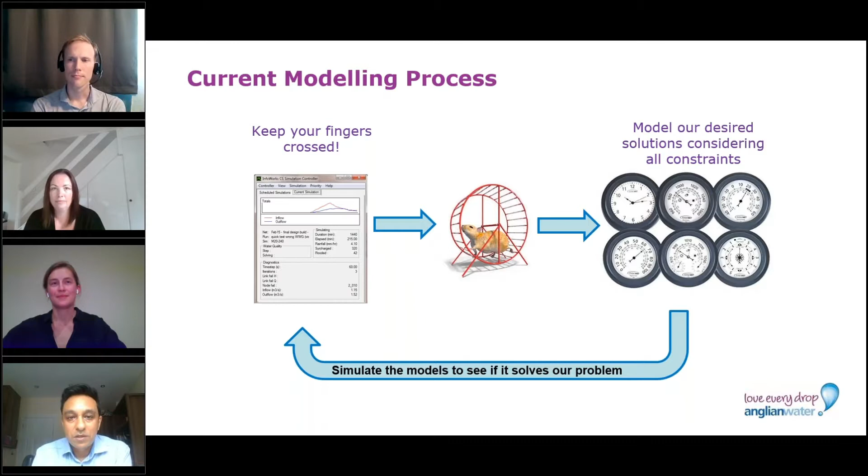Now, the Optimizer way is very different, and it's actually very refreshing, a nice way of working whereby you all collaborate together. You get all the stakeholders together, be it construction managers, design engineers, or the modeling team, and you sit down and discuss the costing of the project, whether it's a flooding issue, a spillage issue, just risk you need to mitigate against, whether you can implement SuDS, or whether you're going to use any hard engineering.

This is quite a refreshing way of working, because I'm sure it's the same for everyone. Quite often when you're halfway through your modeling process, the engineer comes up to you and says, you can't build here, by the way, because there's a big gas main there, or there's a big oak tree and we can't cut it down. And quite often you're going back and forth, taking 3 or 4 steps forward, taking a few steps back. So that's a really refreshing way of working.

The actual process with Optimizer uses artificial intelligence, which I think our industry as a whole hasn't really exploited and utilized. And I feel we're at a time now where we're catching up, and it's just the right time for our industry with all the efficiencies demanded of water companies. The artificial intelligence uses very clever algorithms. I don't understand them fully, and that's where we've got the expertise of Optimatics' team.

The way I look at it, in my simple mind as a modeler, is it kind of breeds options together. So if you're trying to solve flooding and you've got 2 good options but they're not quite right, you can breed them together using these clever algorithms and mathematical equations, so you get better and better results. Through this process, we're always using our engineering judgment, so you can input all that knowledge and judgment into the way the process works.

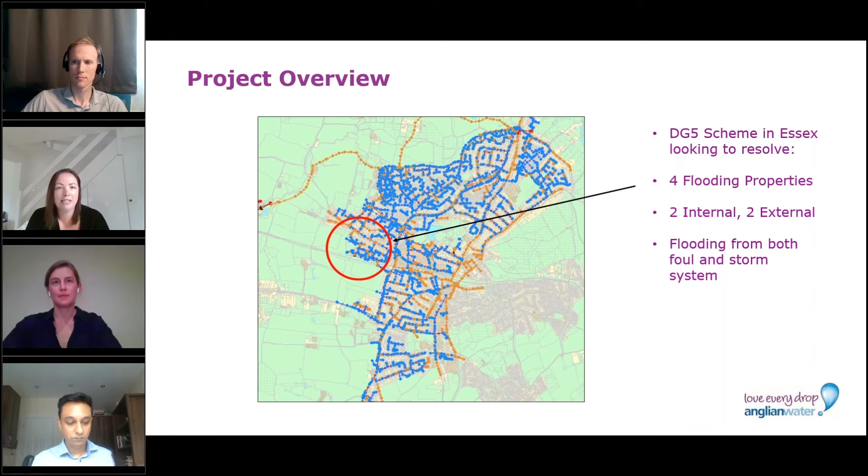So obviously we went through the normal modelling processes that Vish outlined at the beginning of the presentation. Next slide, please, Vish. So we added additional detail into the model. We did flow surveys and asset surveys, so verified the model. It was predicting the flooding at the properties, so a really good starting point to start developing solutions.

I did go around in my hamster wheel for quite some time to try and develop a solution that actually worked. It was quite a difficult one to get right, mainly due to hydraulic and also constructability issues. So the solution was conveyance in the end, to allow flow to get further downstream to where there was capacity. Unfortunately, after we developed the solution, it was deemed unaffordable, mainly due to constructability.

You can see there's a road highlighted on that plan. There were issues with highways, very difficult to close the road, and we actually needed to cross that road as part of the solution. So we thought that this was a really good project to use Optimizer to see if we could come up with something slightly different, and whether we could exclude going across that road. Was there something else that we perhaps haven't thought of? So I will now hand you back to Vish, who's going to discuss setting up Optimizer.

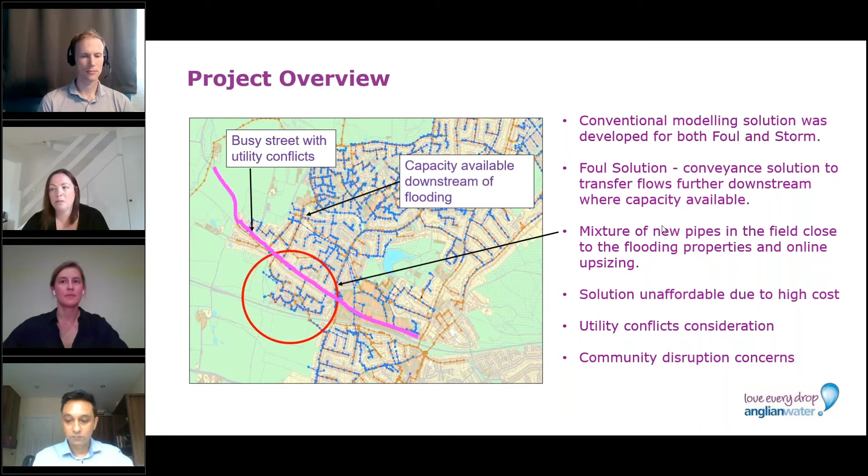Thanks, Dom. Yeah, setting up the model in Optimizer is a very different way of thinking from a modeler's perspective. At the moment, the way we model, you look at each option by itself, whether it's storage, cross connection, online storage, offline storage, whatever it may be. Now, as I mentioned earlier, we have to collaborate up front, and the reason for that is we have to look at the whole catchment and decide what options you'd like Optimizer to analyze.

So in this situation, we identified that there could be storage in this location down here at the south of the catchment. There was potentially a cross connection there, and we thought we could lay a new pipe there. So it's quite a nice, refreshing way of working in that you get the pool of stakeholders together up front before you start the project. It irons out any potential surprises as you're modelling through, and it's nice that you get everyone's buy-in up front, and everyone knows what to expect at the end.

Now, the modelers out there may be thinking, if you're going to model the pipes in and let ICM run the model, how do you turn pipes on and off? The way we got around that was we put weirs at either end of new pipes, and we either set the weir levels at ground level or just above ground level, and therefore the pipe cannot be utilised by flow, so there's effectively no pipe there, or the weirs can be set down to invert level, in which case the pipes can be utilised.

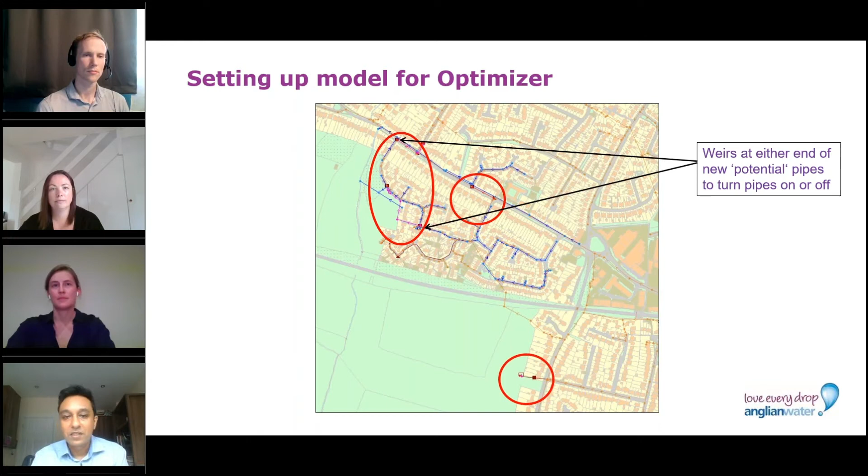So we have to set the model up in this way. Once this is all set up, then we send the model up. Well, we upload it all into Optimizer, and then from Optimizer it then goes obviously into the cloud.

Now, the planning criteria, so setting the boundaries in Optimizer was quite interesting. Now, Dom's going to go into this in a lot more detail, so I'm just going to touch on these for now. But the flooding penalties is a very interesting one. So the way we sort of tell Optimizer if it's doing a good job or not so good job is by penalties. So if the penalties are high, that means a flooding, or that means we're very far away from our desired solution. If the penalties are low, that means we're homing in on a good solution.

So the first one is obviously the flooding penalties at the local flooding location. There's surcharge penalties, so we don't want to surcharge the system too much. Flow to treatments are an interesting one. I'm not sure about it in the USA, but in the UK, the treatment managers and the business are very concerned about how much flow we're sending to treatment and if the treatment works can cope. So Optimizer and the software can actually monitor the flow to treatment. So when you've got your desired solution, you know how much more or less flow is going to treatment.

Pipe costs and storage costs, that's quite self-explanatory. If it's a good option, the costs are low. If it's not so good, the costs are extortionate. Flooding penalties catchment, again, Dom will elaborate on this further as we go through the presentation, but that's there just to keep an eye on the fact we're not pushing the local flooding elsewhere into the catchment. I'll now pass it back to Dom, who will go into a bit more detail on the decisions.

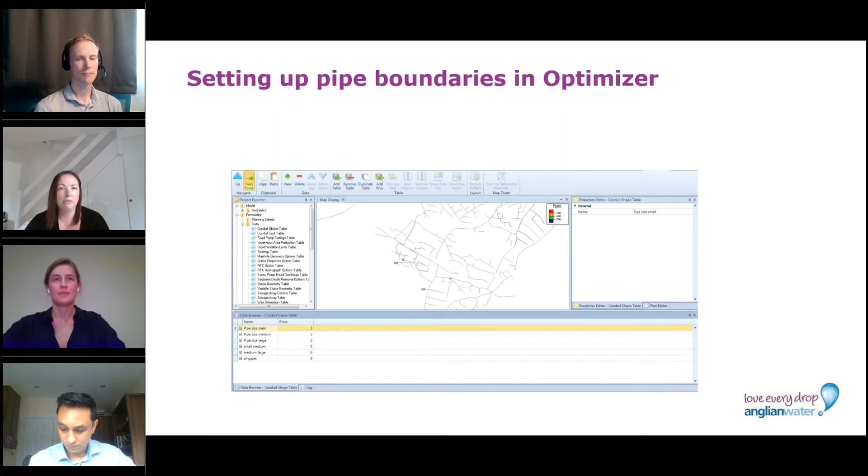The big thing for us was looking at all the different pipes within the catchment. Now, obviously, we have a long list of possible pipe sizes, for us ranging from as little as a 150 millimeter up to a 1050, so quite large pipes. So we decided we would group these in the end, just to make things slightly easier, because obviously there was quite a wide range of pipe sizes within this catchment.

So if you've already got a pipe size where you're sitting at maybe a 450, then you don't really want to allow the software to have a choice of thinking about whether you're going to go below 450. So you might say, well, actually, we'll just put that group of pipes into the pipe size large there that you can see in the middle of that table. Next, please, Vish, thank you.

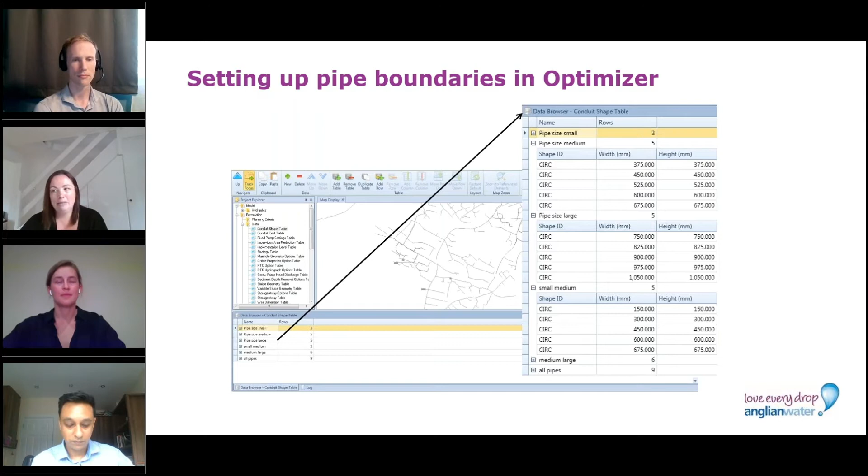So in the very early setup that we had for our project, it was very much a very steep learning curve for us. So you can see there on the left-hand side, we've got categories. So where is the sewer? Is it in a road? Is it in a field? Is it brand new? Which obviously has a different cost associated with that. And then you can see on the far left-hand side, there's just a list of numbers. So that's the number of pipes in the decisions. So you can see there that there's well over 400 in there, which is a large number of pipes for Optimizer to consider, which is possible.

But actually, once we went through this, we decided we needed to hone in a little bit more to give us a little bit more definition of what we wanted. So in the final setup that we actually went with, we had a lot more categories, and this allowed us to highlight areas where we knew that there were restrictions.

So obviously there's the highway that I mentioned earlier in the presentation. There were also some sewers via railway, again, in terms of constructability, not fantastic. And then you can see there on the far left-hand side, the numbers are much reduced. So now we're over 100 pipes instead of over 400. So we've really honed in on our area of interest.

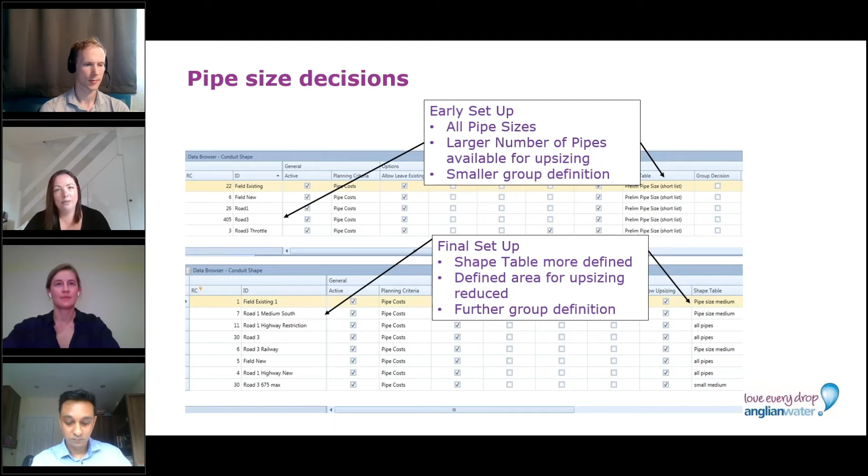So this next slide is just a screenshot from the software itself, and it gives you an example as to how easy it is to set up your decisions. The table at the bottom, it's just a case of creating your groups, which you can easily do as selection lists in ICM and then bring them into Optimizer.

And then you've obviously got your cost tables, which you can add into Optimizer. And then it's just a case of looking at what you want to do in each of those areas. So it's tick boxes: do you want to upsize, downsize, leave it alone, don't look at it. And then assign a shape table associated with that. So what pipe sizes are you going to be looking at for those particular pipes?

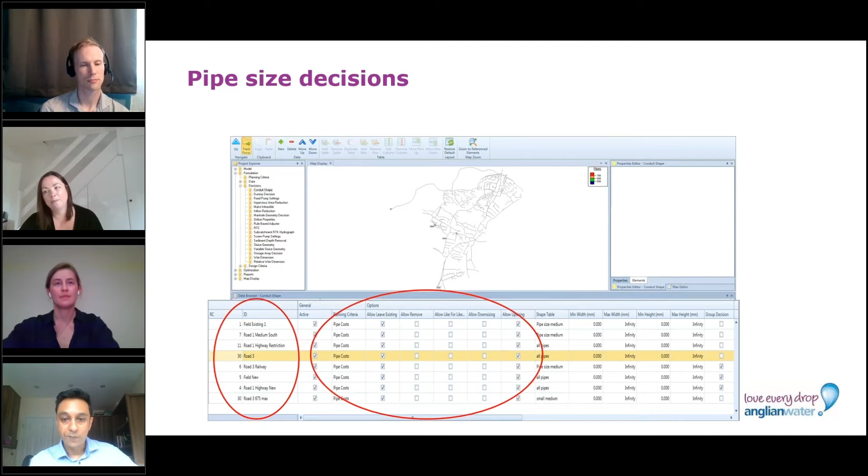So once we'd got all that set up, which was great, we then moved into thinking about the penalties. Now, certainly for Vish and I, we never really thought in this kind of way before. So it was interesting to get our heads around. And I think once we had a chat to Lucy and talked it through, we got our heads around it. So it's a very easy penalty function. It's exceedance times a multiplier.

We decided for this project we'd break this down into local flooding. So on the property itself, outside the property, we obviously want zero flooding for the solution to work essentially. So we applied a very high multiplier here. But what you also don't want to do is just send the problem elsewhere, further into the catchment. So basically you move the flooding from one location into another location.

So again, we had catchment-wide flooding as well, catchment-wide penalties. So the penalty multiplier was slightly lower, but it still meant that we could keep an eye on what was happening in the rest of the catchment, which was really useful.

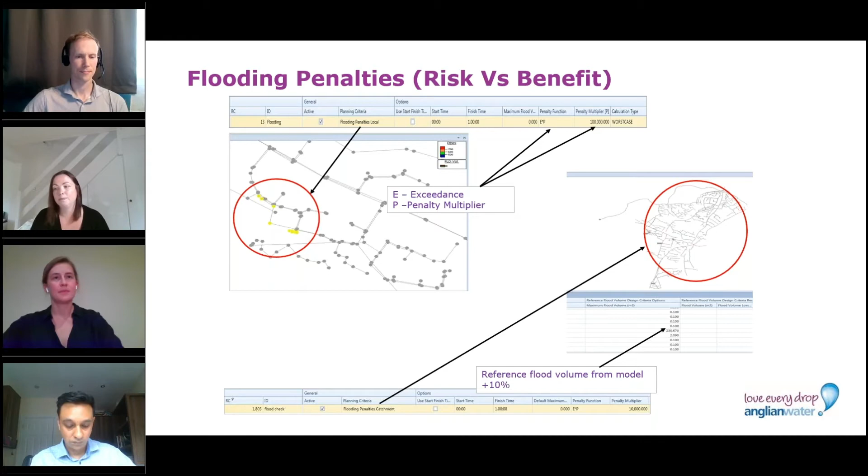So now we're going to go to a poll question. How many scenarios do you usually create for comparison? Great, thank you, Dom. And our responses are 1 to 2, 2 to 5, 5 to 10, and finally 10 plus. Leave the polls open for 30 seconds and then share the results. Thank you. Great. And 71% responded with 2 to 5, 17% said 5 to 10.

Thank you. Thanks, Sean. Go ahead, Vish. Thanks, Sean. Yeah, thanks.

Thanks, Dom. That poll's quite interesting, actually. So 2 to 5 is probably standard. That's roughly what we do at Anglian Water, near enough. Every now and then it's a bit more, maybe.

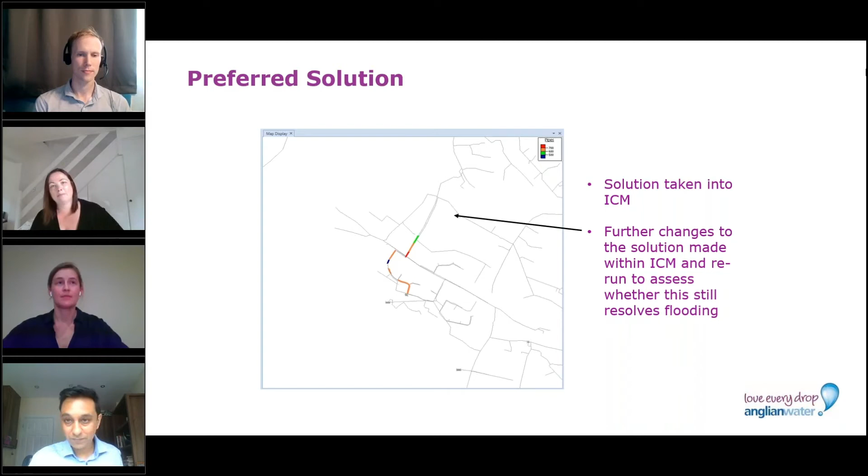Thank you, Dom. I think we're going to have another poll question. So, do you account for social, environmental, and/or carbon impacts as part of the optioning process? Great. Thank you, Vish. And our responses are social, environmental, carbon footprint, a combination of the above, or none of the above. We'll leave the responses open for 30 seconds and then share the results. Thank you.

Well, we all know what the right answer should be. And 69% said a combination of the above, and 18% said environmental. Thank you. Thank you very much. That's interesting.

Yes. When I saw this poll question earlier, I was thinking, well, there's only a certain amount that the human brain can actually process. If you use artificial intelligence and clever algorithms, you can incorporate so much more. But that's interesting that we try our best to use a combination of all of the above.

Right. Just finishing off now, if I can get to the next slide. One thing that I thought when I saw this, I thought, this is great. I said, Dom, we can just come in, click a finger, and we can go off to the pub. But it's not as simple as that. We still need our modelling expertise. You still need that hydraulic knowledge and all the experience. And then there is a computer, garbage in, garbage out.

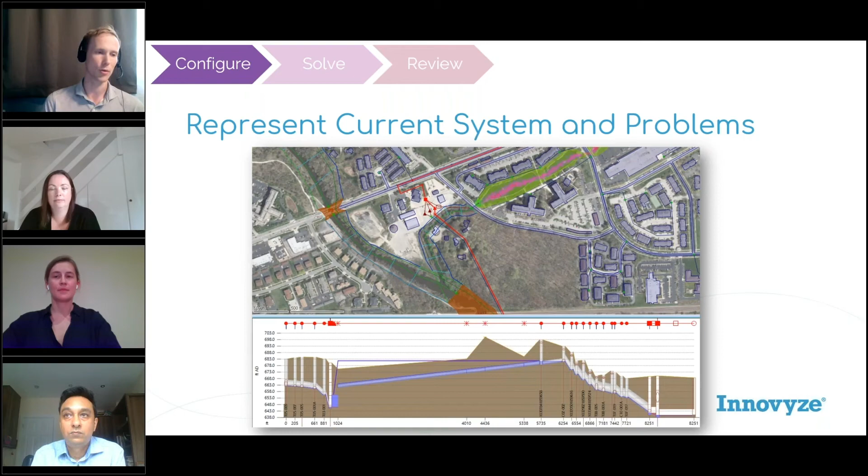So starting off with configuring, InfoWorks ICM is pretty widely regarded in the industry as an excellent solution for being able to represent the current system, the current problems, as well as the solutions. So Anglian Water had to be able to accurately represent their current flooding problem and understand the exact physics going into it so we can test out solutions. And we also need to be able to then simulate those actual solutions, whether it be with green infrastructure or other solutions. So ICM is just a very versatile product for representing those exact physics in a really realistic manner.

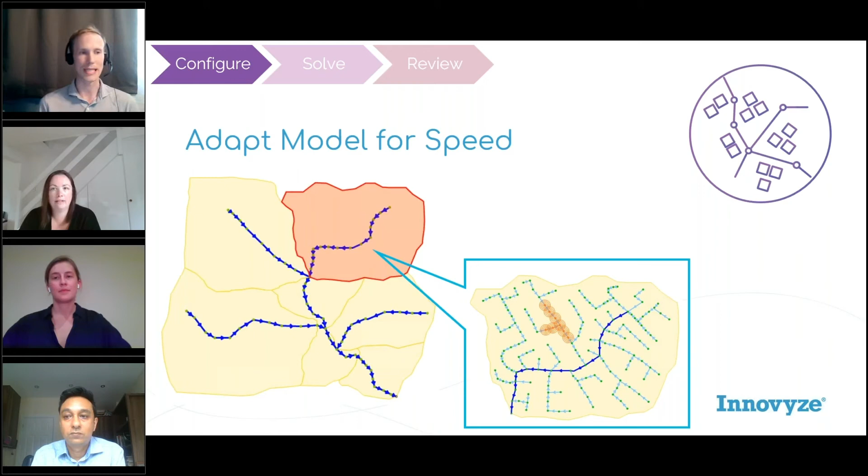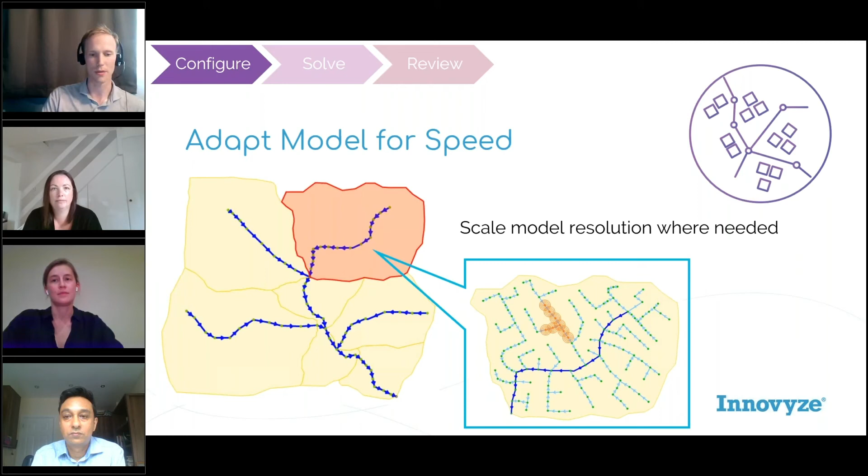Similarly, there are tools that can help you use ICM if you need to adapt your model for speed. It's really easy to leverage multiple different resolutions if you wanted to simplify your models, and you can expedite the iterations of simulations. And also, what they did in this project was they set up multiple different pipes, and then they close them or open them using weirs. So with ICM, I find it's a really good platform for being able to manage large systems or many different iterations.

So rather than manually clicking, it has a database that is already geared for being able to apply widespread changes based on logic. The database understands how the connectivity is applied. You can understand which pipes are connected to which nodes and which subcatchments, which gives you a framework for being able to write SQL queries, for example, where you can write just a quick bit of code and apply widespread changes to create objects, edit objects, delete objects throughout your network without needing to manually point and click a bunch of times.

And you can also then take it the next step to Ruby scripting if you wanted. I'm not a Ruby scripter, but I was able to write a simple query that was able to generate many different scenarios for model sensitivity studies. And then finally, you can also leverage nearly unlimited scenarios. So it just creates a platform where you can test out and QA/QC many different arrangements and possible solutions in your model without needing to manually point and click.

So the next step is solving the model. ICM is regarded as one of the fastest engines in the field, and one of the reasons is that it uses a fully implicit numerical scheme. That means generally larger time steps, and you also get reliable results in fewer iterations. Similarly, it can definitely do parallel processing, so it can use the full CPU, queue up simulations in parallel or in series.

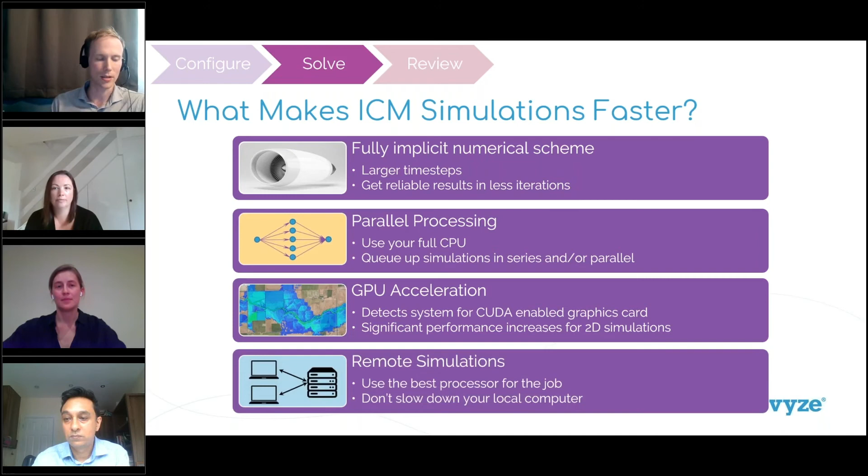We can use GPU acceleration if you're doing any 2D simulations, and it's also integrated so you can leverage multiple computing resources. So you can farm out simulation tasks among different computers. To illustrate that, you could have an engineer working on their laptop connected to other servers within your network. Other engineers can also be connected to that pool of resources, and you can just continue scaling horizontally.

This same model has been applied in the cloud with Optimatics. They have many different engines all integrated, set out horizontally, for being able to simulate hundreds of thousands of simulations in a relatively short period of time. So then finally, reviewing the model, we saw that you can obviously review the many different options within the optimizer solution.

But before you make that significant investment, we saw how Anglian Water brought their optimal solutions back into ICM. You can reintegrate it with the full detailed model and then review all of the different processes and how they interact. ICM gives good visualization for looking at dynamic maps, profiles, graphs, 3D views.

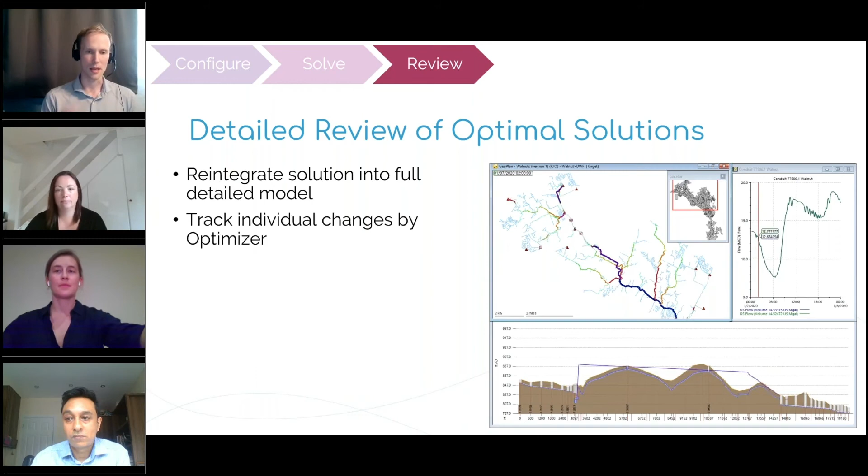You can also track the individual changes made by Optimizer. Every little change that Optimizer recommends, you can see what it was versus the previous value. So it's pretty transparent, and you can use this visualization for stakeholders. This helps you notice any unanticipated consequences from using a genetic algorithm to create optimal solutions.

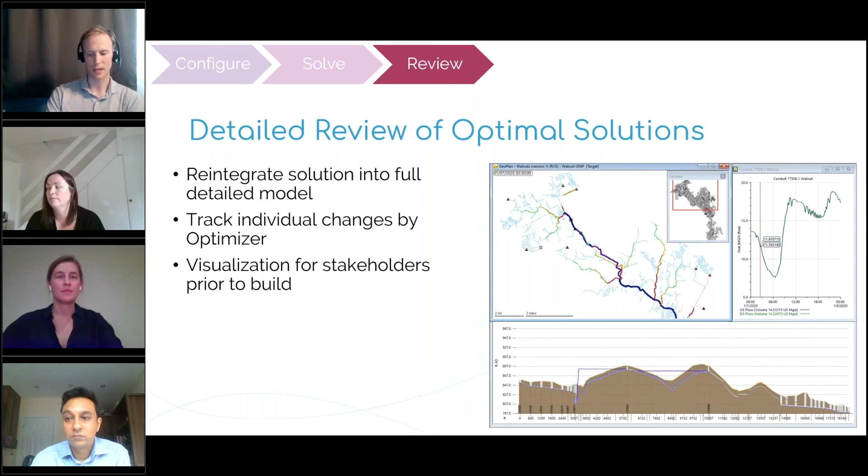In this case, they were able to easily spot flooding being pushed downstream to other spots in the catchment. They were able to catch that within the optimizer, but depending on whether or not you caught that, this gives you that extra layer of thorough review. So in summary, ICM and Optimatics is a fully integrated solution. We've been working with them, and we're pretty excited about it.

Innovyze and Optimatics worked together to develop a direct API connection, so that when you ask for new runs from Optimizer, it can directly pull your latest model from your ICM data server, run those many iterations on their cloud resources, and you can easily pull them back into ICM. So at the end of the day, what you get is optimal designs with confidence. That's the final takeaway.

A last little comment is that this project was using ICM for a sewer and storm system, but we also have water modeling integration with InfoWorks WS Pro.